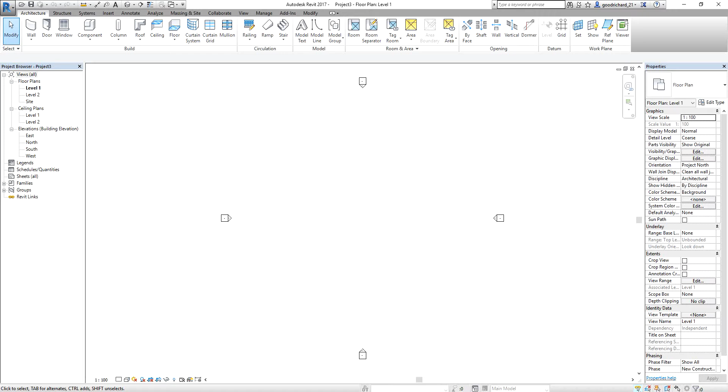To begin with, I'm going to use a standard architectural template, and then I'll create a wall, because as you know, our door is a wall-hosted family, so we need to create a wall first to place our door. I'll create any size, any length of wall as long as I can place the door there. After that, I'm going to select the door tool.

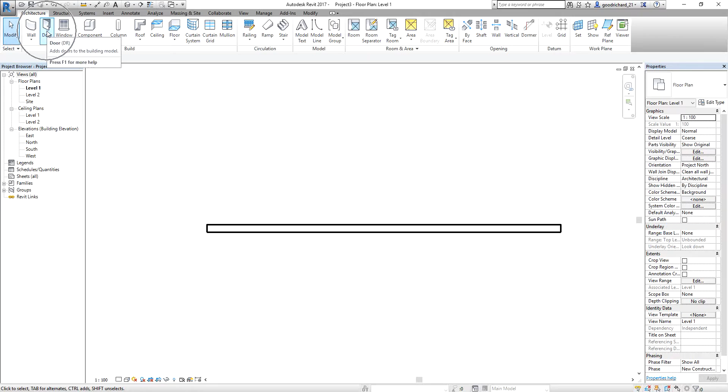I'm going to load the door that I want to modify. So I select, then go to my desktop. This is the door that I want to load to my project. Then I'm just going to place it here, and I'll select modify.

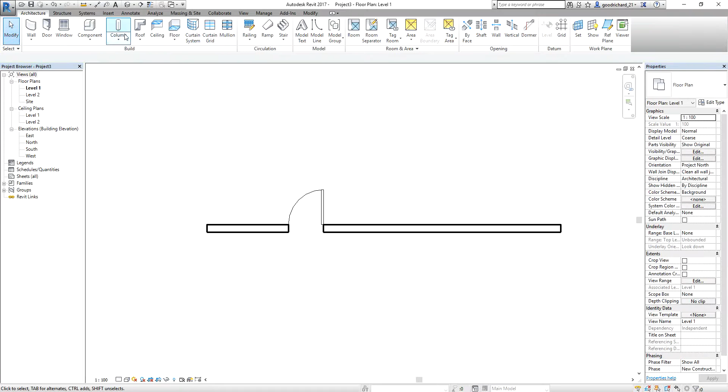If I change my view to the 3D view, it looks like this. I'll type SD for shaded view. So this is the door. What I want to do is edit this door, modifying this component family by creating parameters and geometry in it.

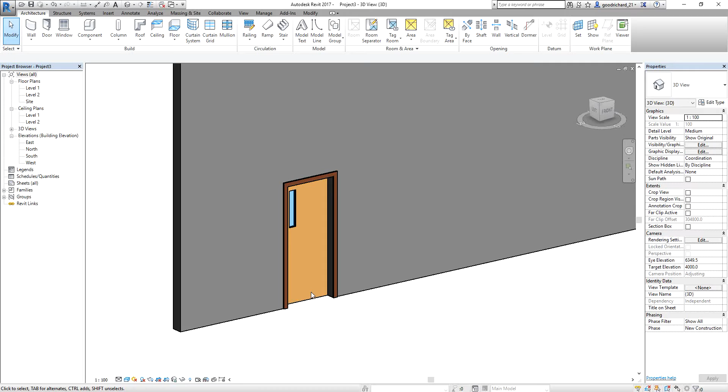I'll start creating parameters in the door family. To do that, I'm going to select this door, and then as you can see, there's the mode panel. I'm going to select edit family here. There you go, so this is now the family editor of that family.

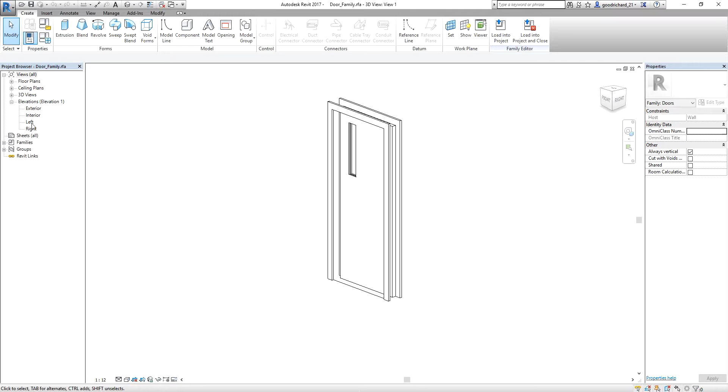What I'm going to do is change my view to elevation view. If you want to use this door, you can just message me and I'll share this door with you so you can follow the exercise. I'm going to change my view to interior view, so I'll double click that, and as you can see, you have reference planes here, and you also have parameters.

To begin, I'm going to create first a reference plane. As you can see, currently in this view, they already created the reference plane, and then they have the parameters. So we are going to create also the reference plane.

Let's say in this exercise we want to add a kick geometry on our door, so I call it kick. This kick that we are going to create, we're going to make it visible and invisible so that you have an option for your door if you want to show the kick geometry or if you want to hide it.

So what I'm going to do is add a reference plane, and then I'll create a horizontal reference plane. The length is not critical to this exercise. After I create the reference plane, I just select modify.

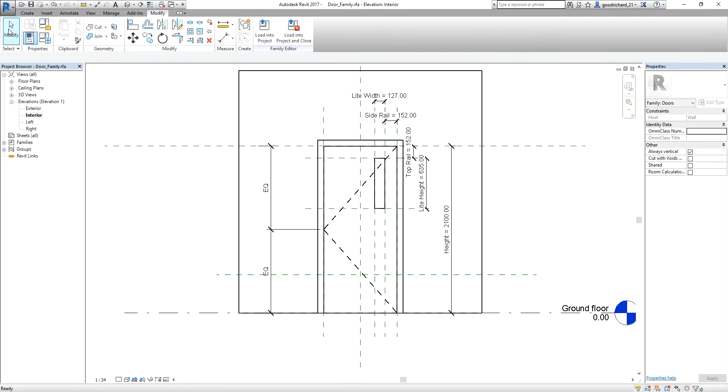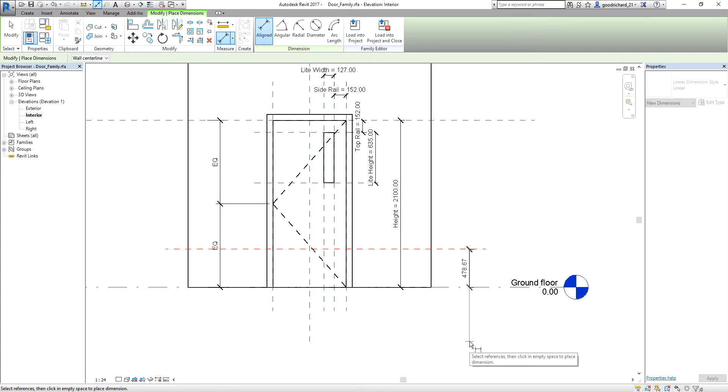After they create the reference plane, the next procedure for this typical exercise is to add a dimension. So I'm going to select this tool to add dimension. I select this, then select the reference plane and then the level here, and then I just click another point to place the dimension. Then I select modify again.

Now you notice that the dimensions have names, right? That's because they already created the parameter. So that is what we are going to do next. After we create the reference plane and the dimension, you need to create a parameter. So how do you create a parameter?

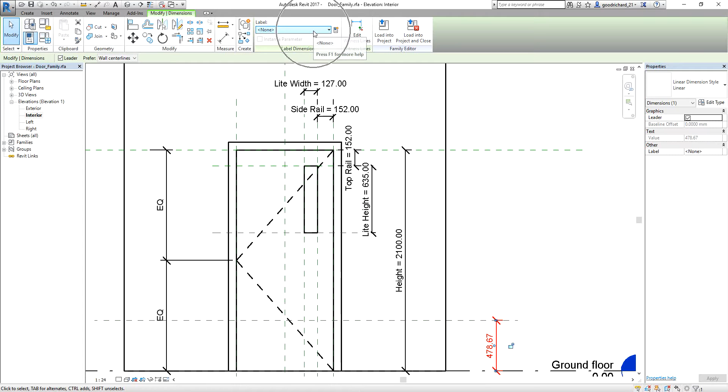The first option to create a parameter is to select the dimension, and then you need to select label here. As you can see, there's no parameter. Let's say the parameter that you are looking for is not here.

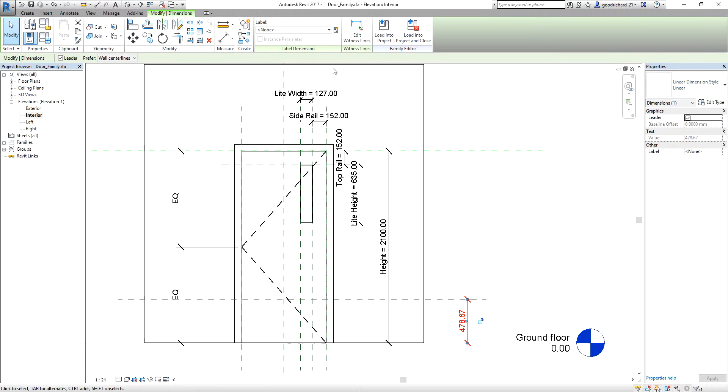All right, so what I'm going to do is create a parameter by selecting these family types. Because if you already have the parameter that you need, you just need to select the dimension, then click the drop down arrow here, and select the parameter that you want. But let's say, for example, the parameter is not here.

So what you can do is select this icon here to create parameter. Or you can go here, there is an option there to create a parameter also. But this is much easier, so you just need to select create parameter in Revit 2017. Okay, and then the parameter that I want to create here, let's say I'll just call it my kick height.

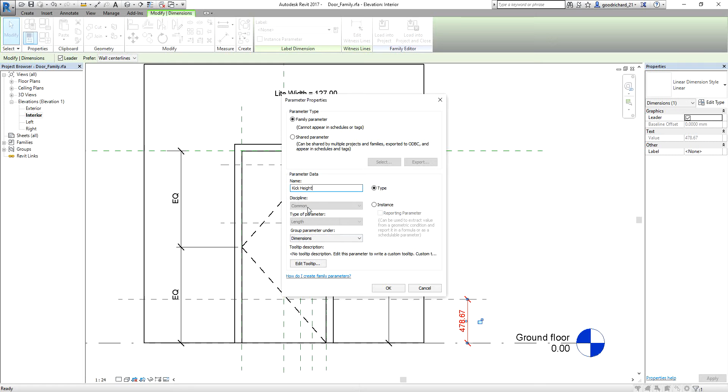All right, and then I'll just place this parameter to my type properties, so I'll ensure that type is selected. And then I just want to put it under the group dimension. So the type of parameter is length, discipline is common, so this is the name. After that, I select OK. There you go, so there's already the name of the parameter.

If you want to test out if your parameter is working or not, you need to flex. So you just need to select this icon here. That is the next thing that you need to do. Always check if the parameter that you create is working or not, you need to flex it. So I'll check my kick height parameter if it is working.

So I select this, and as you can see, there's the kick height, right? So if you click, it highlights to your model. That is one of the new features in 2017. So you click and then you can change the value. Let's say I'll change this to 600 and then apply. So you will notice it's working, right?

The parameter is following whenever I change the dimension. So let's say 800, right? So it's working, okay? 400, apply. So it's working.

Okay, so another way, instead of specifying the exact value, you can also use the formula. Let's say for example you want to reference your kick height to the width, so you can use the width as a reference to your kick height. So what do I mean?

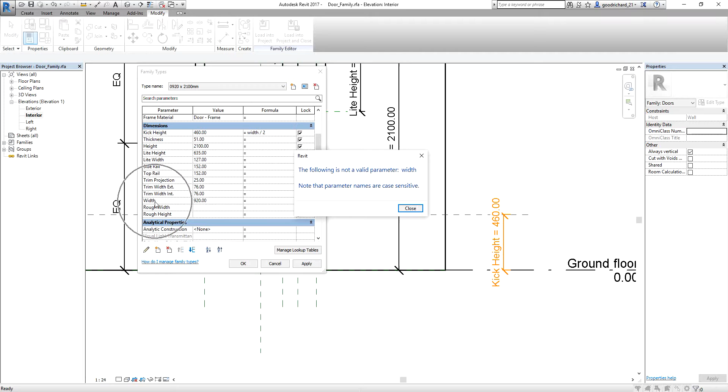Okay, so you need to key in the exact dimension of your model, because let's say for example I change that to small w and then I will apply, so it cannot. Why? Because make sure the formula that you're going to key in here has the same name as the parameter, because it is case sensitive. Okay, so it's case sensitive, so you need to key in the exact name, right? Okay, and then I'll just select OK.

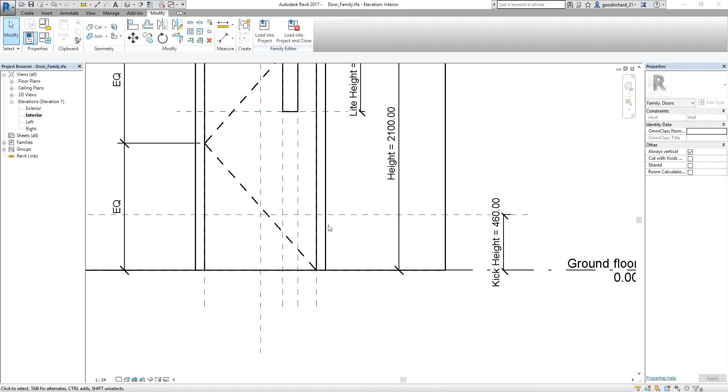All right, so after I create that parameter, the next thing that I'm going to do now is to create the geometry to this door family. So I want now to create the kick geometry. To do that, I'm going to select the create tab, and this time I'll use the extrusion tool, solid extrusion. I select this, and I'm going to make sure that the geometry that I will be creating will be placed on this face.

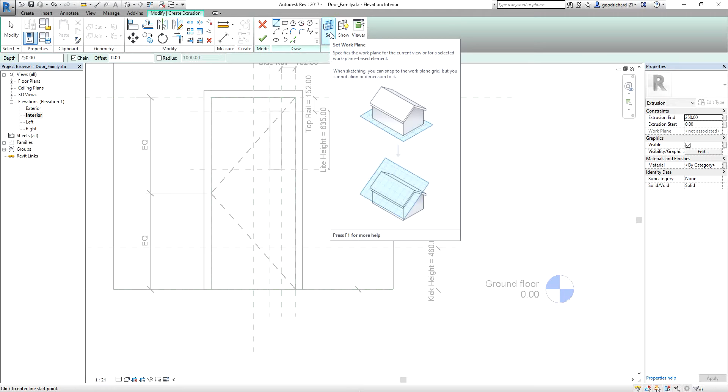That's why before I create the extrusion, I'll just set first the work plane just to make sure. So I select set work plane, and then I'm going to select here pick a plane. So I'm going to pick the plane and then okay.

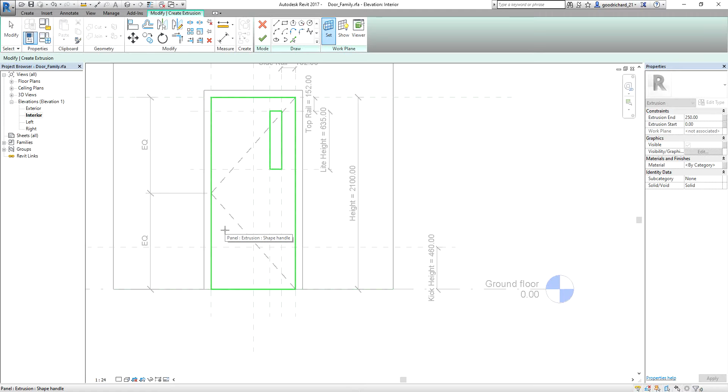Then after that, I'm going to make sure select elements by face here is selected, so that when you place your pointer to this face, as you can see, it's now highlighted, right? So we want to pick this face to place the work plane.

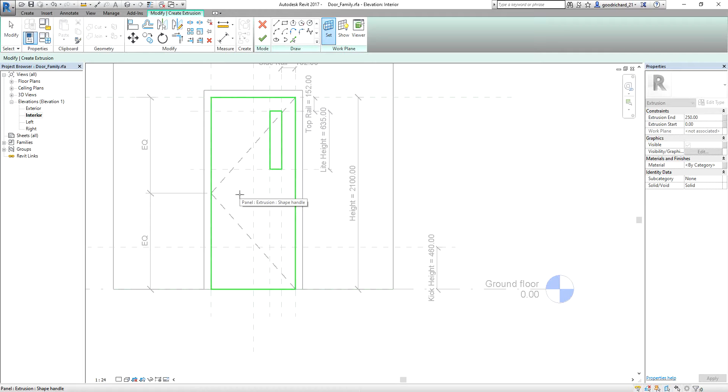Okay, so make sure this is checked so that it would be easier for you to highlight this face, right? So I'll just select, make sure when you pick a plane, you select this face, click, there you go. So the work plane now is on this face.

So I'm now going to create the shape of the kick by using rectangle, and then I'll pick here 1, 2. Okay, and then as you can see, there are padlocks there, so make sure you lock it. You click that lock icon, click that, click that. So why do we need to lock it? So that when we change the kick height, our geometry will follow also.

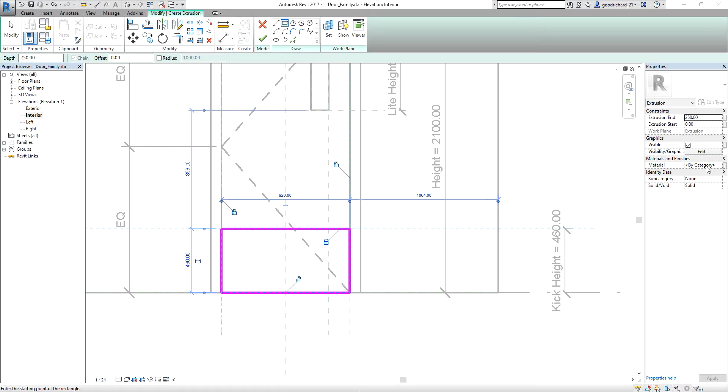If I change the kick height to 500, our geometry will change also to 500. If we change the width, the geometry will follow also. That's why we need to lock it to that line and to that reference plane. That is the importance of locking your sketch.

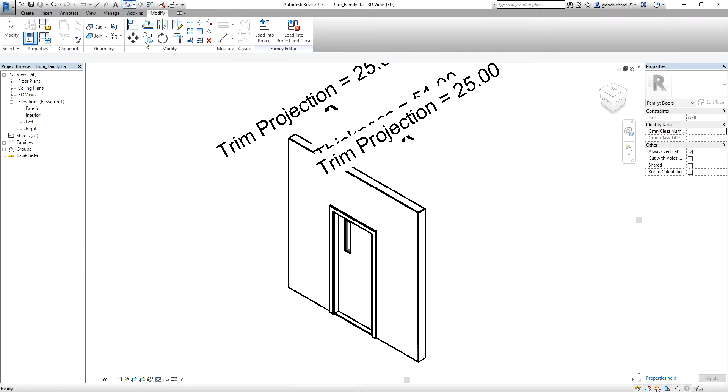And then after that, for the thickness of my kick here, let's say the thickness is just 5 mm. So I change the thickness, the depth of my kick, to 5 and then check. I just select modify to deselect, and then if I go to the 3D view, it looks like this. Wait, I'll just turn on the thin lines. There you go. I type SH for shaded view. So this is now my kick.

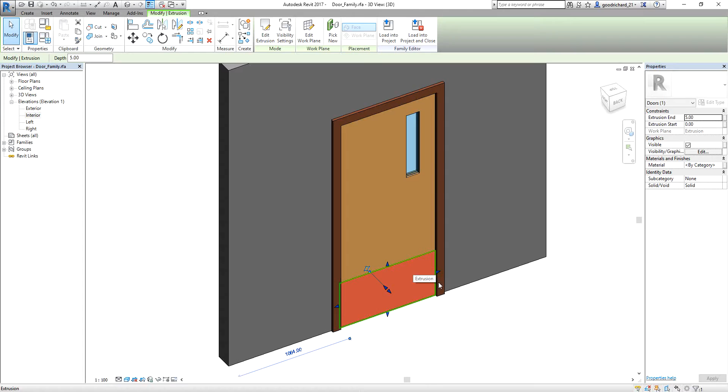Now what I want to do is I want the user to have an option if they want to show the kick or not. So let's say they want to have a door that has a kick, and let's say they want to have a door that doesn't have a kick. So I'm going to create a parameter that allows me to do that. So how to create a parameter? Another way, because a while ago we already created the kick height parameter.

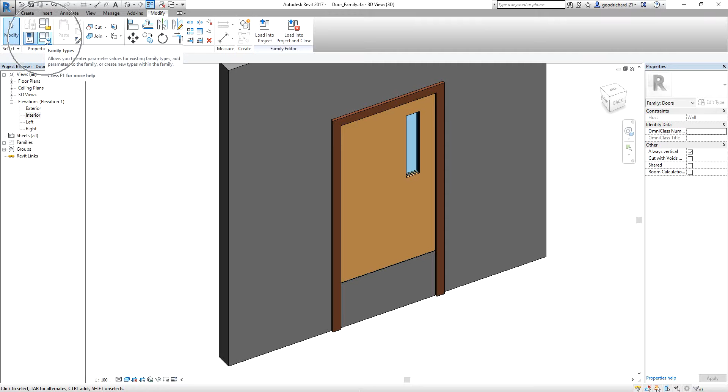So this time, another option, you just need to select family types. And then I'm going to select new parameter. Same window like what we had when we created the kick height parameter. For the name, I'll just call it kick. The discipline is common. This time, the type of parameter that I'm going to use is yes/no.

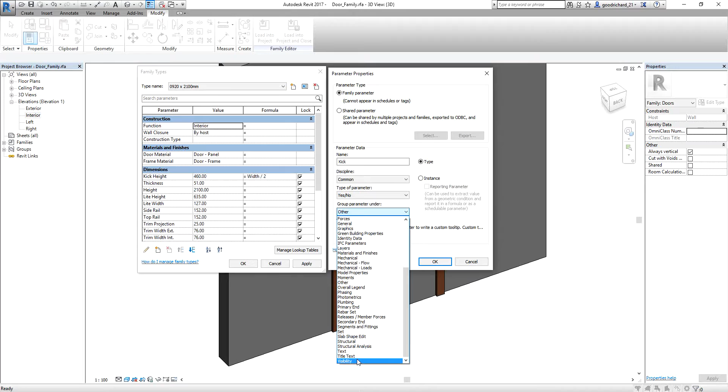So I can select yes if I want to show the kick, or no if I do not want to show the kick. So yes/no parameter, and then I'm going to group it under visibility. There you go. And this time I'm going to select instance.

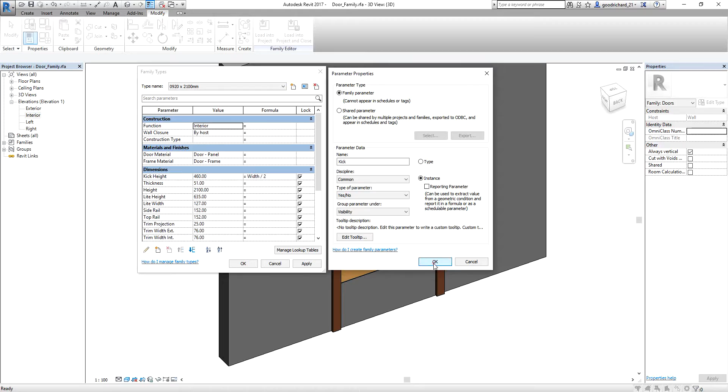The first parameter that we created, the kick height, we placed under type, right? This time, this kick parameter, I'm going to place it on my instance property. I'm going to show you later what's the difference. So I'll just select OK. There you go. So you now have this visibility.

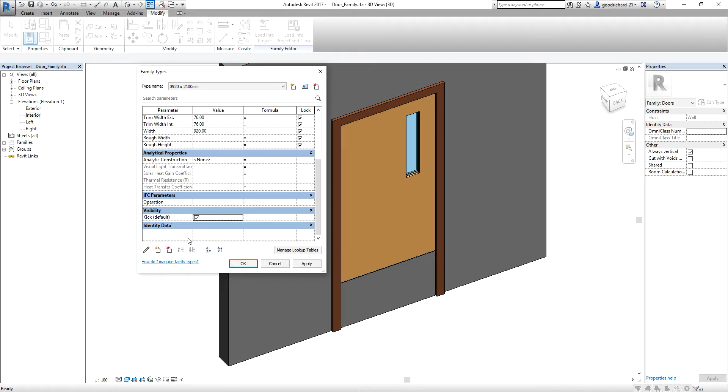If you see the default word here, meaning that particular parameter that you just created is an instance parameter. If there's no default word, meaning that is a type parameter. Just to give you an idea. So after creating the visibility parameter, I select OK. And then I'm going to apply the visibility to my kick.

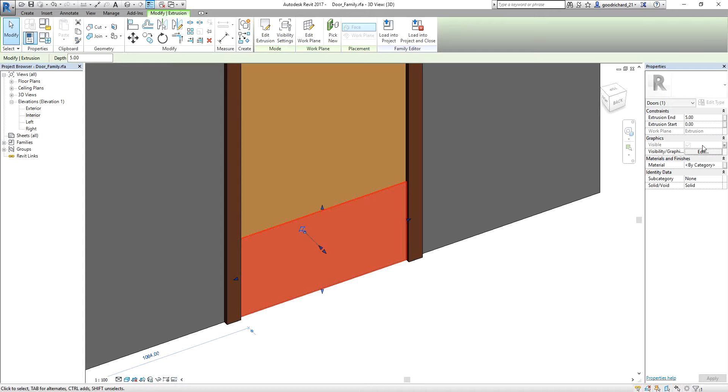So I select the kick, or the elements that you want to apply the visibility to, and there is this visible parameter in your properties. I want to associate that element to the parameter that I just created. So I select this button, and there's the parameter that I created, and I select OK. So that visibility parameter, the kick parameter, is now associated with this element.

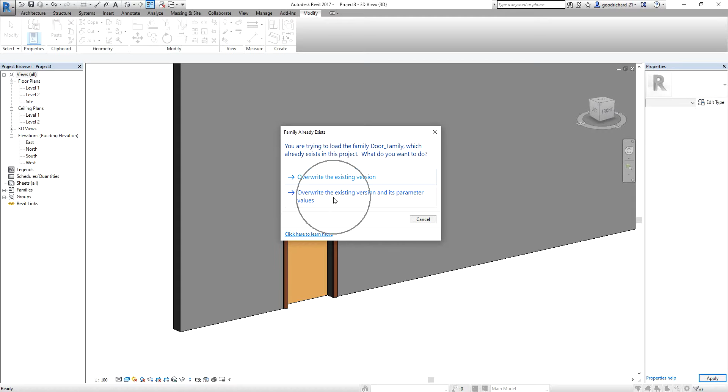Now I'm going to load this door to the project that I created a while ago. So I select load into project, and then overwrite the existing version and its parameter values. You just need to orbit to the other side. There you go. So as you can see, the door here on my project 3 is now updated.

And another thing, if I select the door here, remember my kick parameter, when I added that to my instance properties, as you can see, there's the kick. Because if you select an element, the properties that you're seeing here are called instance properties. So if you select here Edit Type, this is what we call type properties.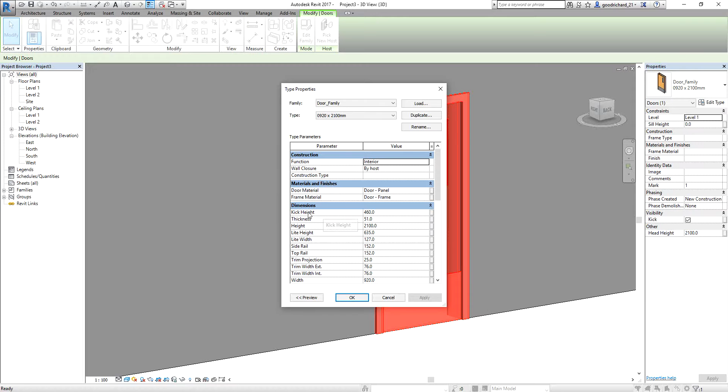That's why you will see here the kick height parameter, right? Because when we created the kick height, we assigned it to type properties. That's why it's here. Now, when we created the kick parameter, we assigned it to our instance properties. That's why it's here on the instance properties. So you see? So you have an option if you want to turn it off, or you can turn it on.

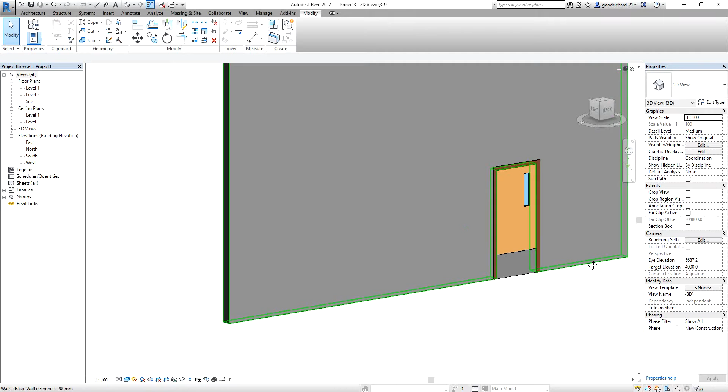Okay? So let's say I'm gonna create a new door. So I click this, right click, Create Similar. So I just place it here. 1, 2, 3, 4. Alright, and then I select Modify. So let's say I do not want to show the kick here, so I can click this, and then I can uncheck, right? Okay.

Or you can also select multiple doors or multiple elements by using window selection like this, or by clicking one by one. You just need to hold Control to select other elements, right? And then after that you can click, right?

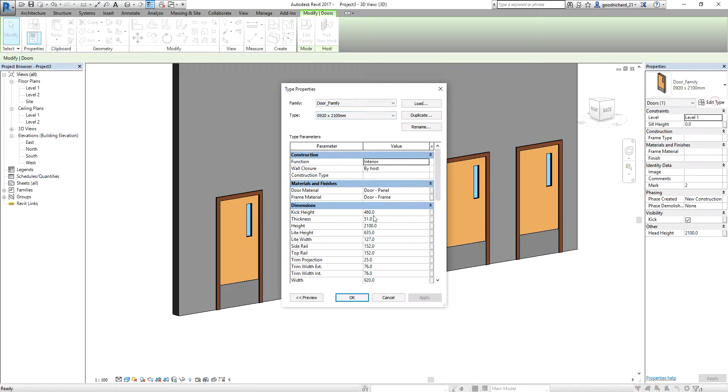Okay, so what is the difference between the instance properties and the type properties? In the instance properties, any changes that you make to these properties will only affect the selected element or elements. That's why if I select these two elements and then I uncheck this, it only affects these two elements. It did not affect the other three elements, right?

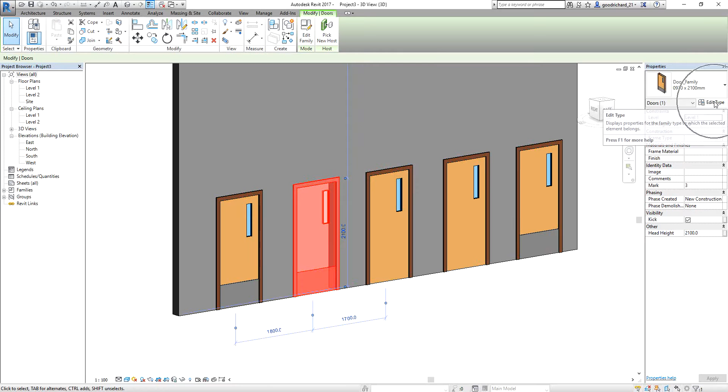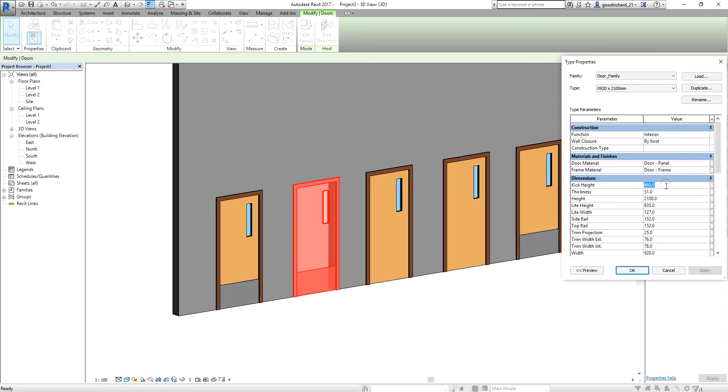But if you change a property or parameter in your type properties, it will affect this type. So if this type of door is loaded in a project, let's say I have here 5 of this type of door. Okay, so if I change here the kick height, let's say I change that to 600, you will notice all of them will be modified, right? You see? The other 3 doors updated, right?

Of course, you will not be able to see the kick here because we turned it off, right? So I'll just select OK. So let's say I turn it on. You will notice it changes also, right? So that's the difference between the instance properties and type properties.

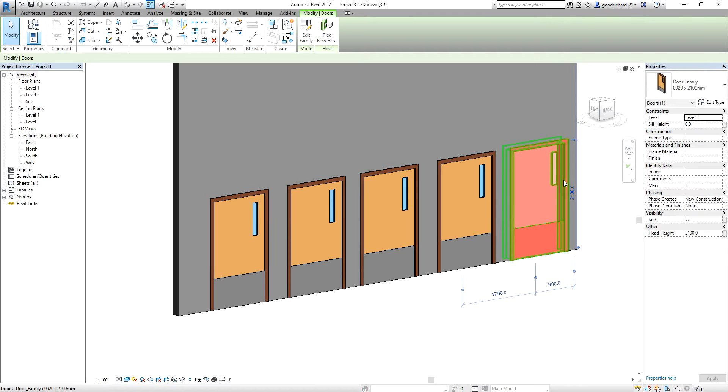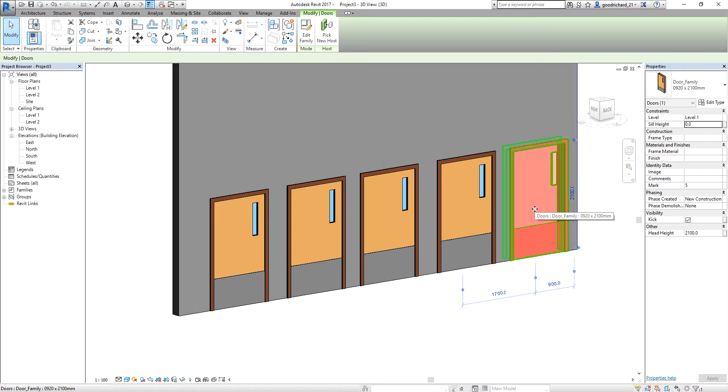So the instance properties affect only the selected element or elements. Okay? So if I change here, for example, the sill height of the door to 1000, you will notice it only affects this door. Any changes that you make to your instance properties will only affect the selected element or elements. But if you change the type properties, let's say you inserted 5 doors of this type into your project, and then you change the parameter here, it will affect all the doors.

That's why another tip: do not just simply change, for example, the sizes here. Make sure whenever you change a parameter, you duplicate first. Otherwise, it will override all the elements that you have here. Let's say in your mind, you want to change the kick height of this to 600, and then you change it to 600. You didn't know that all of these elements already changed to 600, which you do not want. All right?

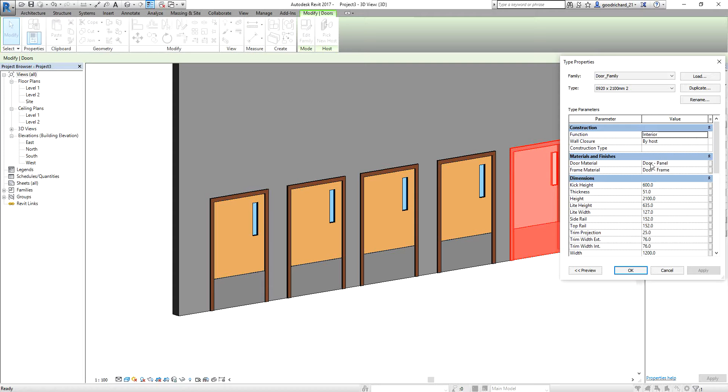So just make sure before you change a parameter here, you duplicate it first. And then you just change the name accordingly, and then okay. So that you now have that type. So this type is now saved from being overridden because you already have this type. So after you create the type, you can change the name, and then after that, that's the time you can change the parameters on the type properties. All right? So hope that is clear.

And that is the basic way to create your component or modify a component or standard loadable family.